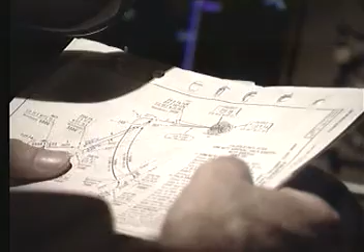The Faliolo VOR, the ILS DME and glide path for runway 08 were all unmonitored. Only the Faliolo DME and NDB were clear of defects. As a result, they were cautious and made a thorough preparation and briefing. Their planned approach was going to take them around the DME arc to join finals for runway 08.

It was a dark, moonless night and the controller at Apia was reporting scattered cloud over the airfield. As an extra precaution, they briefed for the VOR DME approach to runway 08 in case the ILS was not functioning. In a moment, we'll let the crew help tell you the story as they made their approach for runway 08.

The glide slope capture happened almost immediately after the approach mode was selected. The captain had the aircraft in vertical speed mode to slow down and was concerned that the aircraft seemed to accelerate as it pitched down with the glide slope capture.

As we came around the arc, everything was fine. But suddenly, at glide slope intercept, everything became rushed. The aircraft pitched down, but now the aircraft was a lot faster than you should be as you commenced the descent for the ILS. But the ILS indications were all correct, so the captain concentrated on managing the energy problem.

I reconciled it by saying tailwind, heavy weight. There were no flags, no warnings of any sort to indicate that there was anything other than an autopilot capture of a valid localizer and a valid glide slope.

The first officer did not remember talking to Apia Tower about this time because he was focused on assisting the captain with the management of the aircraft energy problem. We were getting preoccupied with managing the aeroplane and slowing down and configuring.

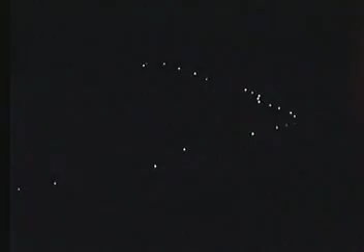He voiced his surprise: 'Well, shit, those lights are close.' At the same time, the captain was doing a DME cross-check, but was unable to make the answer tie up with the aircraft altitude. He decided that there was something seriously wrong with the ILS instrumentation.

The third pilot also checked the DME against the altitude. I did the first DME check, it didn't make sense. What had I done wrong?

And suddenly it all clicked that my DME checks were saying we weren't where we were supposed to be, and almost instantaneously all three of us said, go around, go around. The autopilots were disconnected and a missed approach was conducted to a safe altitude using only the standby instruments.

The captain chose to fly to a safe position to assess what should be done next. He had a feeling the aircraft had deceived him and he needed to re-establish his trust in the instrumentation before returning for another approach.

Once we'd levelled off at 4,000 feet, I was very keen for the captain to put the autopilot in, and I prompted him, but I was keen for him to offload himself, and in doing so offload all of us a bit, so we could ascertain exactly what we were going to do and use the autopilot to help join the arc and fly a second approach.

The first officer called Apia Tower on the radio: 'We've had a false glide slope capture.'

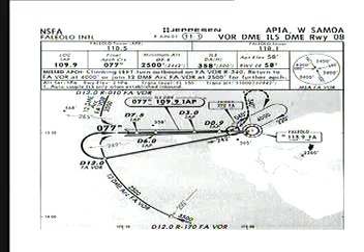The Morse code identifier signal, or ident, is carried on the localizer carrier signal only. The ramifications of this are not widely appreciated. An audible and valid ident is, therefore, only guaranteeing you that the localizer carrier signal is transmitting. It does not ensure that the glide slope is transmitting.

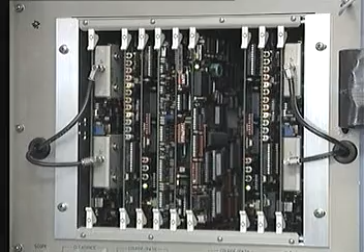If some components of the whole ILS system are not functioning, it is recommended that they should be switched off. Two separate transmitters generate the localizer and glide slope signals. Each transmitter receives signals from a pair of amplifiers.

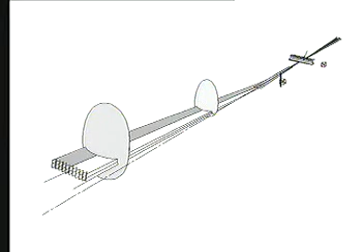Historically, we've been led to understand that both the electronic localizer and glide slope signals form narrow, tightly focused beams which the aircraft receiver senses. The actual signal pattern is, as you will see, rather different.

The two glide slope amplifiers provide signals to the glide slope transmitter. The transmitter then routes the signals to two independent aerials. The two aerials that create the total glide path signal are located on a tower near the runway and abeam the touchdown point.

The lower aerial radiates the carrier wave. This carrier is formed by a UHF signal and is modulated with two other frequencies of 90 Hz and 150 Hz. The resulting signal contains equal amplitude 90 and 150 Hz modulations.

This carrier wave on its own does not provide any glide path guidance. The upper aerial radiates 90 Hz and 150 Hz modulations only.

These signals are transmitted in a specific phase relationship, with the 90 Hz and 150 Hz signals being transmitted by the lower aerial. As a result, a complex interference pattern is formed, effectively creating upper and lower side lobes as shown in the diagram. The null between the 90 and 150 Hz side lobes defines the glide slope.

These patterns are designed so that if the aircraft is below the desired 3-degree glide path, it will sense a predominance of 150 Hz. If it is on the desired glide slope, it will sense the null between the 90 and 150 Hz signals, so the flight instruments will show on slope. If it is above the desired 3-degree glide path, it will sense a predominance of 90 Hz.

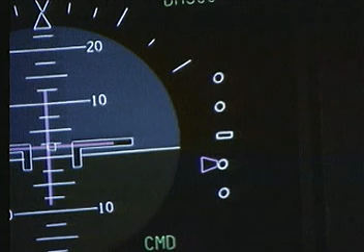This is the normal operation of the glide slope transmitter. Let's look at the abnormal ILS glide slope transmission that occurred on the night.

The glide slope side lobe amplifier was not operating, so the aircraft only received the glide slope carrier wave. Because the carrier signal has equal amplitude 90 and 150 Hz modulations, this signal was electronically interpreted as being on glide slope. But the ILS system is supposed to protect against this type of malfunction.

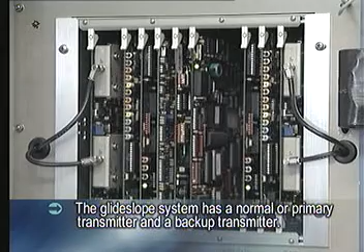So what are the measures that should prevent a faulty glide slope transmission? The glide slope system has a normal or primary transmitter and a backup transmitter. A sensor on the radiation field monitors the signal integrity, and there is also a status indicator and alarm in the tower.

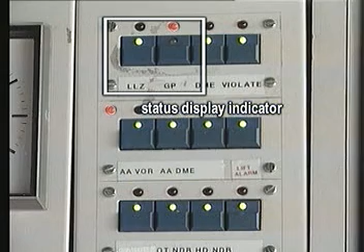For a Category 1 ILS, ICAO rules specify that an out-of-tolerance transmission shall not exceed 6 seconds under any circumstance. If the primary transmitter develops a fault, the system should automatically transfer to the backup transmitter. If the changeover does not occur, or the backup transmitter is also faulty, the system is automatically shut down and the alarm in the tower is sounded.

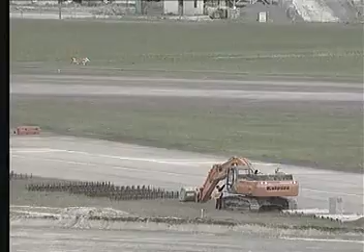However, the runway at Apia was being extended and the cable was cut between most of the navigation aids and the status display in the tower. This resulted in the NOTAM stating that various navigation aids, including the ILS, were unmonitored.

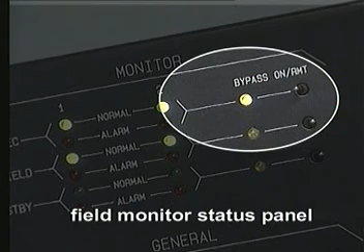But unfortunately there's more. For maintenance purposes, parts of the ILS system can be shut down in a bypass mode to facilitate calibration. On that night in July 2000, the glide slope transmitter with the inoperative side lobe amplifier was left switched to the maintenance mode via a bypass switch so that the system could not transfer automatically to the standby transmitter.

As a result, NZ60 only ever received the carrier wave transmission for the glide slope, and so the aircraft always sensed that it was on slope. As the carrier signal was being received, the aircraft instrument glide slope warning flags consequently were removed from view.

Now let's consider what threats exist and what our strategy should be to deal with these threats. There are many possible ILS problems, but we can categorise them into 4 groups: the false glide slope, the false localizer, the erroneous glide slope, and the erroneous localizer.

The false glide slope and the false localizer are byproducts of the normal ILS transmission. For example, the glide slope signal is transmitted with additional lobes above the primary 3-degree lobe. The first one has a 9-degree glide path.

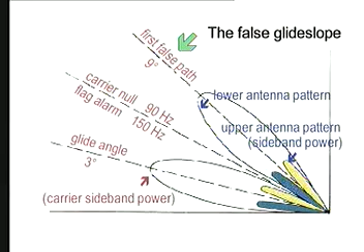If this false glide slope was captured, you would have no flags, show on slope, and have a normal ident, but you would need an extreme rate of descent.

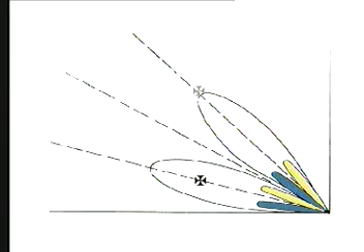The best strategy to detect a false glide slope capture is to intercept the glide slope at the final approach fix to enable a cross-check of altitude against position.

A false localizer is caused by a similar phenomenon to the false glide slope, but in a lateral path. Remember, these false paths exist as a normal byproduct of correct and valid ILS transmissions.

The erroneous glide slope will show that you are on slope regardless of your approach slope or where you intercepted it. You will have no flags, an on-slope indication, and a normal ident. In addition, your sink rate could look quite reasonable.

Even a GPWS would not prevent an accident in this case. The alerts are inhibited if the rate of closure with the ground is within design parameters, and especially if the aircraft is configured for landing, even though the touchdown point might be several kilometres from the runway.

However, aircraft fitted with a terrain awareness warning system, for example EGPWS, would receive an alert in this situation. There is one more complication.

Many modern aircraft use flight management computers for lateral and vertical guidance. Once they have been programmed to intercept an ILS, they will fly to their estimated intercept point and execute a pre-programmed pitch-down manoeuvre in the order of 0.05 of a G. This will establish a rate of descent that has no bearing on the actual glide path. Once this pitch-down has been completed, the aircraft's flight control computers will react to any sensed glide slope deviation.

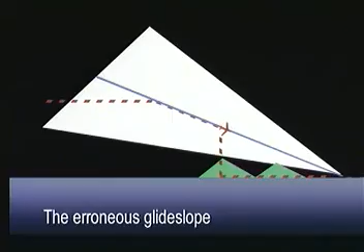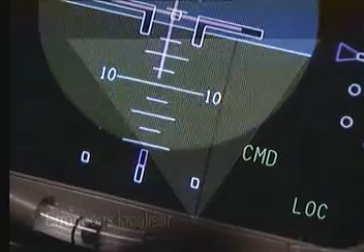The best strategy to employ is to periodically cross-check the aircraft altitude against distance during the descent. The localizer signal is formed electronically, in a similar way to the glide slope signal. The erroneous localizer presents the same problem but in the lateral path as the erroneous glide slope. Again, you would have an on-centre indication, no flags and a normal ident, but the aircraft would not be following the correct path because it would not be getting any lateral deviation information.

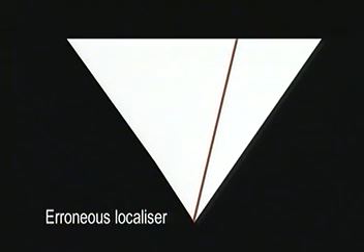The best strategy for this fault is to cross-check the ADF or VOR pointers. They will show any tracking discrepancy if they are selected to the outer marker or a nav aid selected at the field. The investigation also looked at human factors issues, and specifically the crucial strategies which enabled the NZ60 crew

to prevent this incident from becoming an accident. These were team building, preparation, vigilance, and trust.

Preparation for this flight was excellent. The crew arrived early to flight planning. They hadn't operated together before, but they reported that a good feeling of teamwork quickly developed due to the relaxed atmosphere which allowed them all to work effectively.

The crew's thorough discussions regarding the unmonitored state of the VOR, ILS DME and ILS glide path, and the absence of standby power for the ILS glide path also involved the flight dispatcher. On the way to the aircraft, one of the first officers bought coffee for the flight crew and the ISD. All these team-building elements meant that this crew was functioning very well long before the event at Apia.

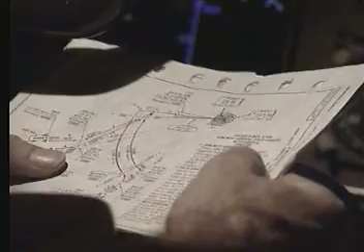Vigilance is what saved this flight. The pilots planned their descent and approach carefully, and the approach briefing was very thorough. During the initial stage of the approach, they confirmed the planned FMC descent profile was being flown on the DME arc by using the 1 in 60 rule.

Because it was NOTAM'd unmonitored, the third pilot continuously monitored the ILS ident for any unseen eventualities. They also pre-briefed for the alternative VOR DME approach.

The crew were watching and waiting, but when the clues arrived, they needed to decide which information was correct before deciding what course of action was appropriate. Probably the best qualified to comment on this process is the head investigator into this event, Mr.

Dave Stobie. Early on in the investigation, it was obvious that this crew were cautious, diligent and well prepared for the approach. They were aware that they needed to cross-check their various pieces of information, but they had a normal mindset for pilots conducting an ILS.

Pilots tend to trust the most precise information. For example, they trust a VOR more than an NDB. They also trust an ILS more than any other approach aid because it allows high precision approaches. So when things didn't feel quite right during the approach, they naturally accepted the most precise information they had, which was the ILS, especially in the absence of any warning flags.

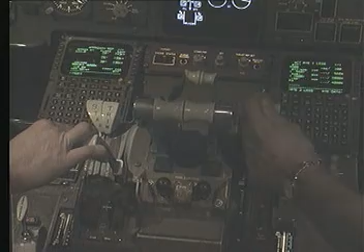That mindset was difficult to break. The combination of a high workload managing the aircraft energy and the trust in the ILS system that they had all been conditioned to have made it difficult for them to perceive the glide path error.

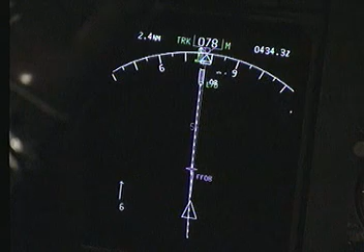When the captain looked up and didn't see the runway lights, he made the mental picture fit by assuming there was weather in front of him. When they saw a descent of just over 1,000 feet per minute, the crew again made the mental picture fit by assuming the tailwind and heavy weight were the cause of the higher rate of descent.

They were presented with normal centerline and glide slope indications on all their instruments. The autopilot had accepted the localizer and glide path guidance signals. There were no immediate clues available to warn them that the information being portrayed on the instruments was, in fact, wrong.

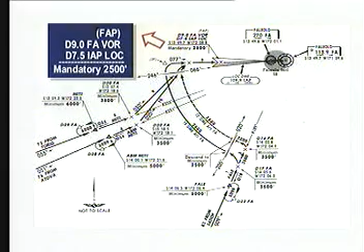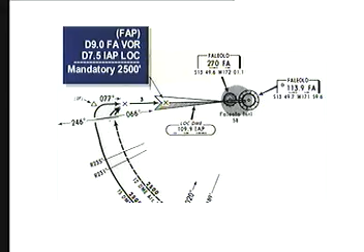The autopilots interrogated all data and found no anomalies with the status of the ILS information and therefore went to Land 3 auto-land mode. The Faleolo VOR DME was the only DME not subject to a NOTAM. With the crew using this DME, the conflict of DME distance against aircraft altitude took some seconds to resolve. The Faleolo VOR DME is 1.5 miles down the runway from the threshold of runway 08.

This required an adjustment of 450 feet to the 300 feet per mile rule to check the distance against required altitude. In the face of a centred glide slope indication, the fact that the distance was anomalous against the actual altitude, combined with the high level of trust pilots have for the accuracy of the ILS, would have created a potential mental question of: what did I do wrong? What error did I make in my calculation?

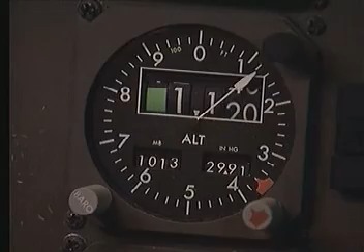Although they didn't understand precisely what was wrong, the conflict generated for each of them from the distance-altitude anomaly and the apparent closeness of the lights on the adjacent island caused them each to break their mindset of the ILS being correct, and make a safe decision to go around, establish the aircraft clear of terrain and above safety height, and then examine their options.

When pilots cross-check information, they do so because they are aware of possible errors. Over the years, we have learnt about many of the technical errors which occur, and we are continually improving our understanding of human error. It's easy to accept the most compelling information, in this case the ILS. This is normal human nature. What this event has taught us, yet again, is that we must remain vigilant and always be careful to validate all the information we are presented with.

When the crew of NZ60 went around, they did so because their trust in the systems and the aircraft had been violated. Trust is interesting. With the open environment that had been created and the team building that had gone on earlier in the night, the crew felt sufficiently at ease to express their doubts and call the go-around.

After their go-around, not only did they have to re-establish trust in their aircraft and navigational aids, but they also had to break the mindset of trust in the ILS, which had been established over many years of training and line flying. We associate precision with trust, so when the crew had a valid ILS signal but the DME cues were wrong, they tended to trust the ILS at the expense of the DME. We trust our instruments, especially if there are no flags coupled with a valid ident.

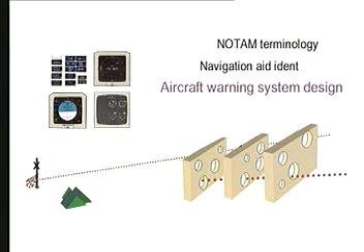The fourth defence was breached when the glide slope intercept check was not completed. The fifth defence, the warning available from a ground proximity warning system, was breached because the aircraft was correctly configured to land, which met all the requirements of the GPWS system.

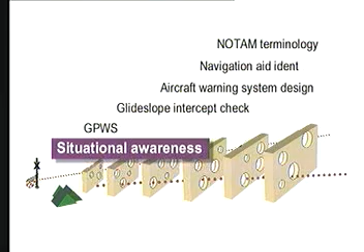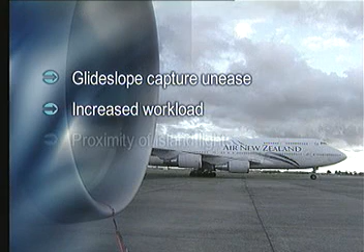The sixth defence held. The crew's situation awareness - involving the unease generated at the glide slope capture, the increased workload to configure the aircraft, the proximity of the lights on the island, and reinforced by the conflict between the aircraft altitude and DME distance - caused them to execute a go-around and protect the safety of the aircraft.